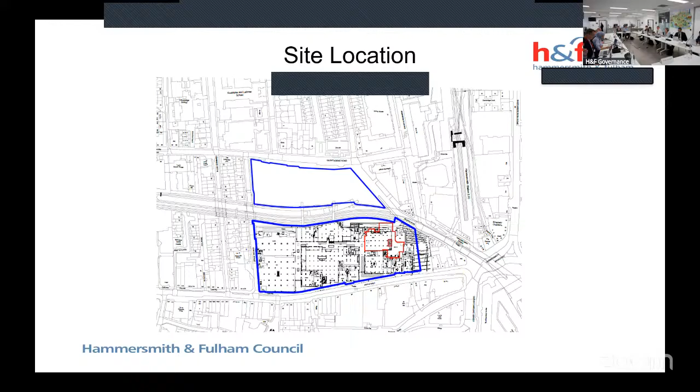That's outlined in red. The shopping centre itself occupies basement, ground and first floors, with 5 storeys of residential development above, known as Ashcroft Square, arranged around a large public square at podium level. The site itself is not within a conservation area, however it is adjacent to 2 conservation areas, namely Hammersmith Town Hall to the west and Hammersmith Broadway Conservation Area to the east.

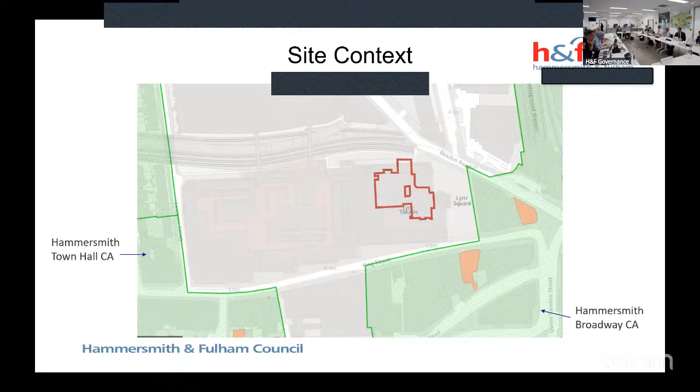The images on screen show the aerial views of the site. Again, the images on screen show the existing site photographs with the entrances to the shopping centre, as well as the inside of the retail unit.

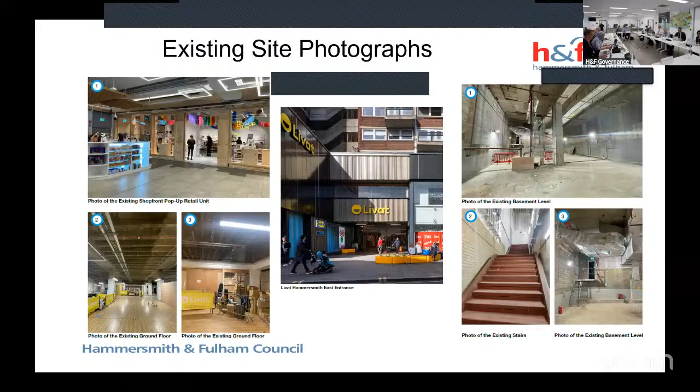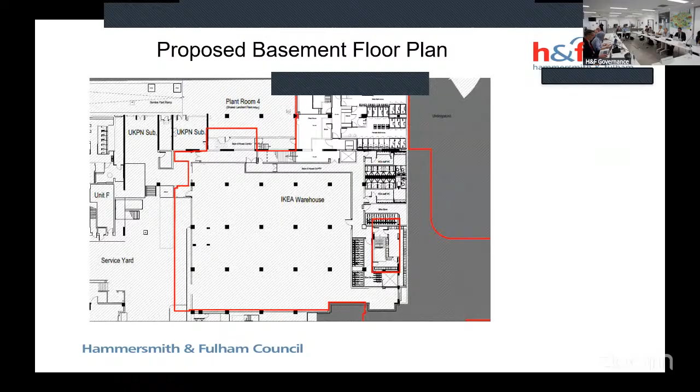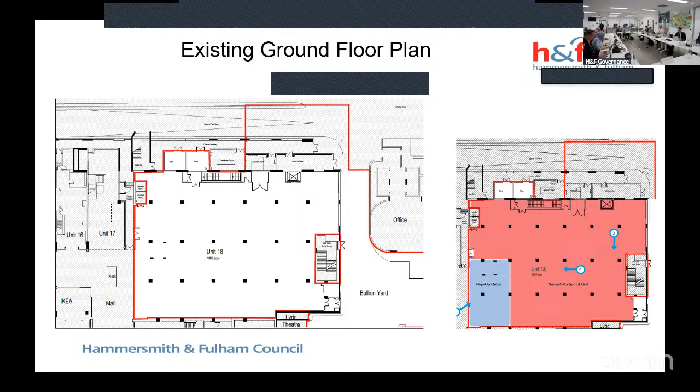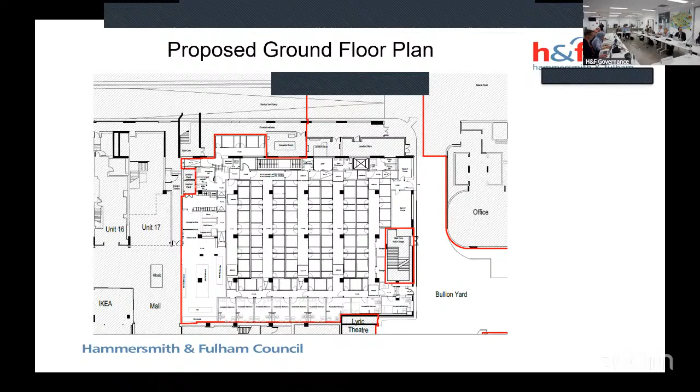This is the proposed ground floor plan, which will contain the hotel rooms or pods. And again, this is the parameter plan, which shows more clearly the uses on site. And this is for the basement.

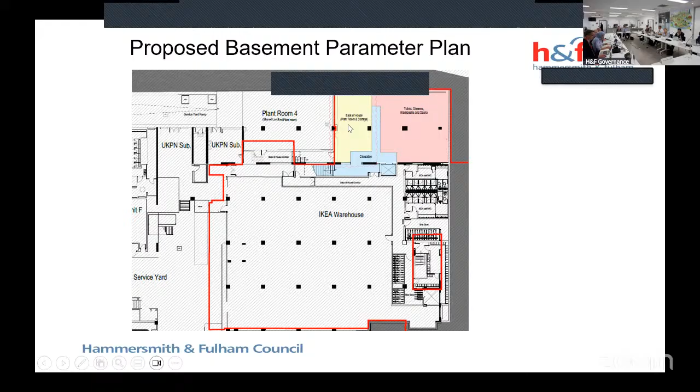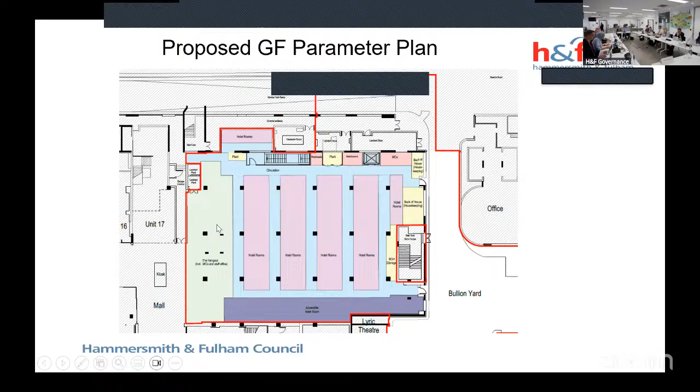You can see the salmon color is the communal shower facilities, and the light yellow is the plant room and storeroom. Similarly for the ground floor plan, this is the parameter plan with the lilac colors where the hotel pod rooms would go, and the darker purple, the accessible hotel rooms. The lime green, light green color is the communal hangout space.

Just a bit more about the City Hub Hotel pod concept. The concept is unlike a traditional hotel. It caters for self-sufficient travelers who are comfortable in a digital environment. Therefore, rather than individual rooms, there are hubs, which include a king-size bed alongside space for storage and luggage. City Hub has shared facilities and spaces, including communal bathrooms and a shared hangout space comprising a reception area, lounge, and self-service kitchen area. These communal areas are designed for people to work and relax.

The operator of this hotel concept has been successfully rolled out in 2 cities in the Netherlands and 1 in Copenhagen. This would be the UK's first City Hub hotel. The idea is that travelers check in themselves and have access to a self-service counter. A City Hub staff member, known as a city host, will be available 24 hours to assist guests as required.

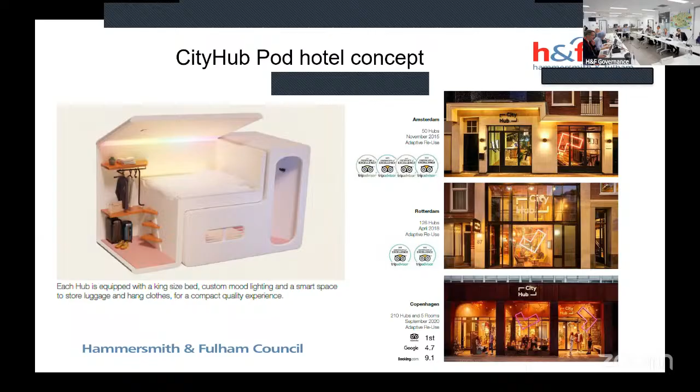The image on screen shows the City Hub concept. You can see in the bottom right corner, these are the L-shaped interlocking pods. So you'd have a bedroom space up here, and you'd also have a bedroom space down here. These are the communal shower facilities. This is the communal hangout space when you first enter the pod hotel. And then these are the self-service check-in counters.

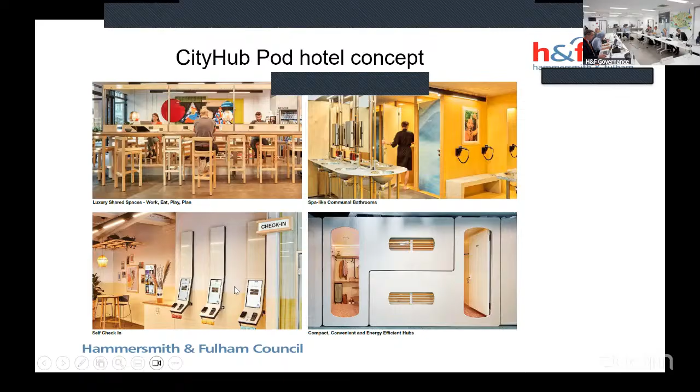In terms of nighttime access, the Livat is open for shoppers between 6:30 a.m. and 9:30 p.m. Monday to Saturday, and 8 a.m. to 6 p.m. on Sundays. Therefore, guests accessing the hotel during opening hours can use any of the shopping centre's entrances, but will most likely enter through the access point on King Street via the access point to the south.

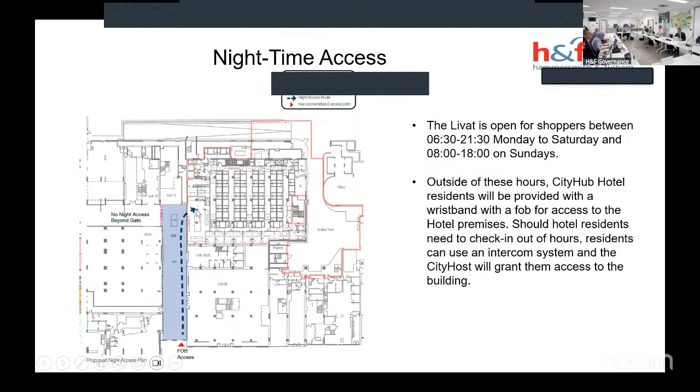Outside of these hours, City Hub Hotel residents will be provided with a wristband with a fob for access to the hotel premises, and the city host will be available to grant them access via the intercom system. The image on screen shows where that intercom would be for the fob access. For nighttime purposes, there'll be a gate here that will be closed, so guests can't access the wider Livat Centre, and they should just be able to enter the hotel itself.

The key issues relate to the loss of the part vacant Class E retail unit and the change of use to hotel. Officers consider this to be acceptable in this town centre, highly accessible location. The existing retail unit has been predominantly vacant since WH Smith vacated in 2020, and officers consider that the change of use into a hotel would not impact upon the viability of the shopping area, and it would help with the vitality of the town centre by bringing in more visitors, which in turn would increase footfall and support the nighttime economy in Hammersmith.

In terms of design and heritage, officers consider there to be no impact as there are no external alterations involved.

In terms of the neighbour consultation exercise, one objection was received from Ashcroft Square. This is summarised in paragraph 4 of the report on page 21 of the agenda pack. However, the main concerns relate to the question around the need for another hotel in the area, concerns over construction noise and disturbance, and potentially more crime in the area.

In response to that, a hotel needs assessment has been submitted, which shows there is sufficient demand for visitor accommodation in this town centre location. Conditions have been attached to mitigate against any potential construction noise and disturbance. This includes a construction management plan and a construction logistics plan. Moreover, an operational management plan has been secured, which will ensure local residents have the appropriate contact details to report any issues. In addition, Section 106 contributions have been secured towards public safety and security in the town centre.

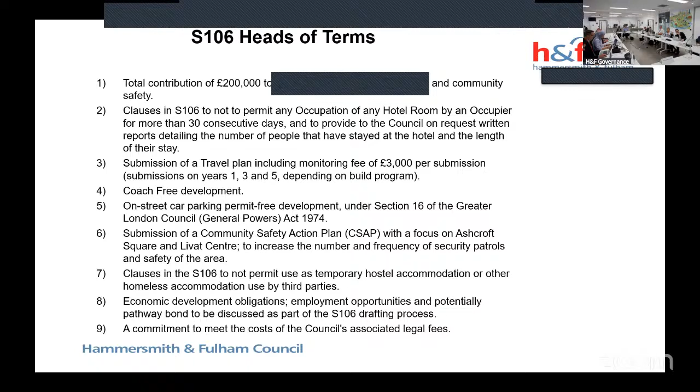For these reasons, officers recommend the application for approval subject to the conditions listed in the report, including the changes noted in the addendum, and successful completion of the legal agreement.

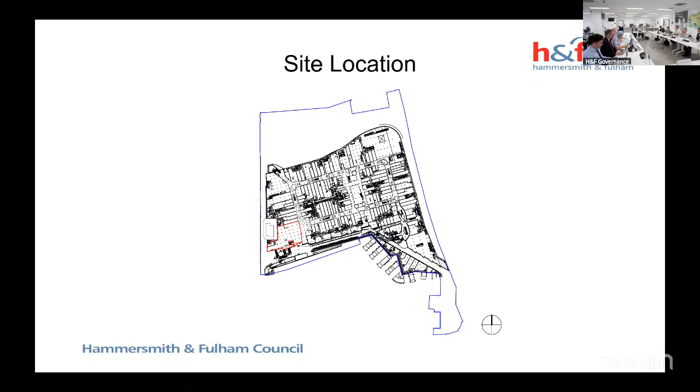The wider Westfield London site sits east of Wood Lane and north of the residential streets, including Bulwer Street, and Caxton Road to the south.

The site has excellent public transport accessibility, level 6A, one of the highest possible levels. The site is in close proximity to the White City bus station to the north, Wood Lane Underground Station, White City Underground Station, and Shepherd's Bush Underground, Overground, and Railway stations.

The site is not within any of the conservation areas, but it sits within close proximity to a number of the conservation areas as outlined in green on the screen.

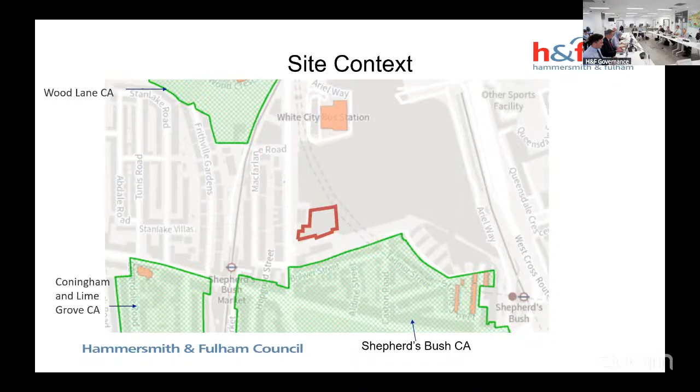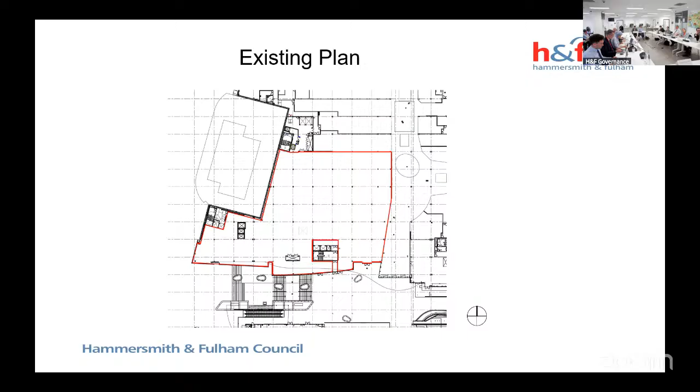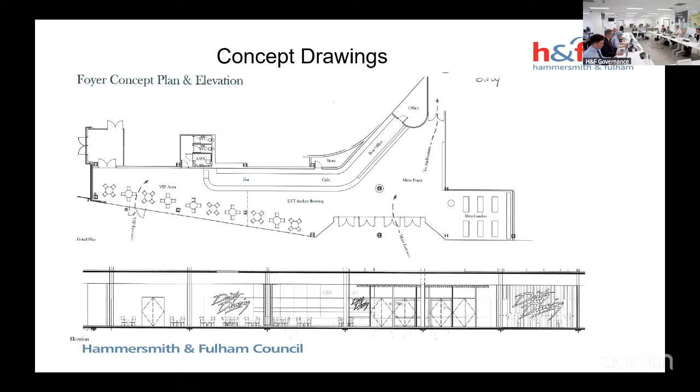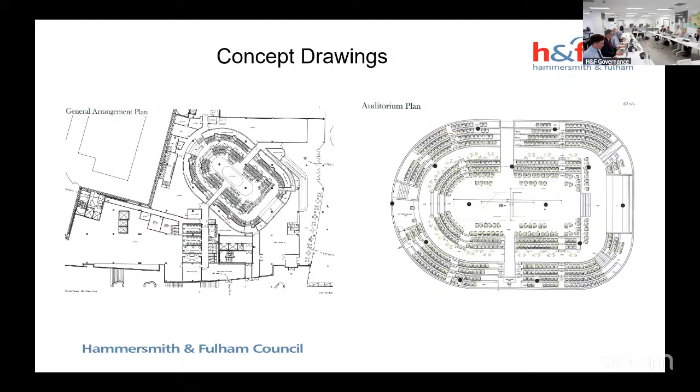The image on screen shows the general arrangement of the auditorium plan, including the seating arrangements. These are some CGIs to help illustrate the proposals, and again, some more CGIs of the foyer and the entrance.

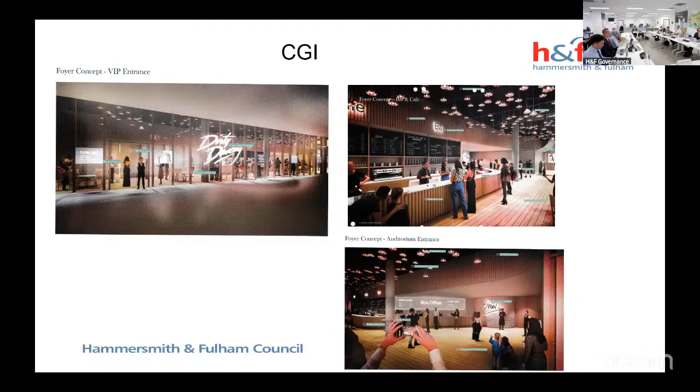The operating schedule for the venue would be Monday, Wednesday, Thursday and Friday with one show at 7:30, and no shows on Tuesdays. Saturdays would have two shows, a matinee at 2pm and an evening show at 7:30. On Sundays, there would be only one show at 1pm.

Doors for the evening performances are expected to open from 6pm, with performances beginning at 7:30pm. The running time is approximately 2 hours and 20 minutes, including an interval, and the last exit time from the venue following the evening performance will be 1am.

The idea is that following the end of the performance, guests have the option to remain and enjoy the music and dance, or can choose to leave the venue. The application is also supported by a dispersal policy detailing how visitors will be managed and dispersed through Westfield in the most efficient way possible, with minimum disruption to nearby residents.

In addition, a final operation management plan will be secured by condition, which will include a commitment to conduct regular community liaison meetings and provide on-site numbers and contact details in the event of any noise disturbance issues. Bearing this in mind, the image on screen shows the anticipated dispersal routes of guests.

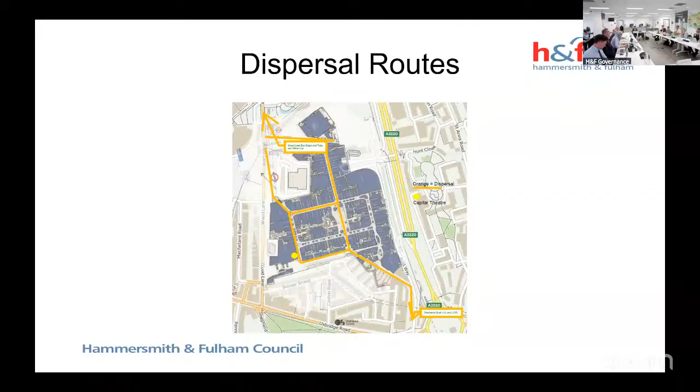Guests will be guided and encouraged to leave via various exits away from the more sensitive residential streets, such as Bulwer Street to the south. The operator has also confirmed that the doors to the southwest corner closest to the Bulwer Street and Wood Lane exit would be locked shut after 10pm, and this would be conditioned or secured via the Section 106 agreement.

In terms of the key issues, these relate to the loss of the vacant Class E retail unit and the change of use to a show venue sui generis use class. This is considered to be acceptable. The existing retail unit has been vacant since Debenhams left in 2020.

The proposed show venue use would add to the existing range of facilities on offer in White City and Shepherd's Bush Town Centre in terms of employment, social and cultural space, and will complement the existing and proposed uses within Westfield Shopping Centre. In terms of design and heritage, officers consider there to be no impact as the change of use is internal only.

In terms of the neighbour consultation exercise, 4 objections were received. These are summarised in paragraph 4 of the report on page 46 of the agenda pack. The main concerns relate to the late closing time of 1am and the noise implications of this and the potential for antisocial behaviour.

As mentioned, a final operational management plan will be secured by condition, which will ensure local residents have the appropriate contact details in case of any noise disturbances. Moreover, given the excellent PTAL of the site, officers are satisfied that subject to conditions, the site can be managed to ensure residents' amenity is protected.

Finally, turning to the heads of terms, the proposed development would include a total financial contribution of £275,000. This includes £120,000 towards the law enforcement team for community safety, £20,000 towards CCTV, £5,000 towards an Ask for Angela or equivalent campaign, £65,000 towards public realm improvements, and £65,000 towards economic development to support the delivery of Upstream London, and finally a commitment to meet the council's associated legal costs.

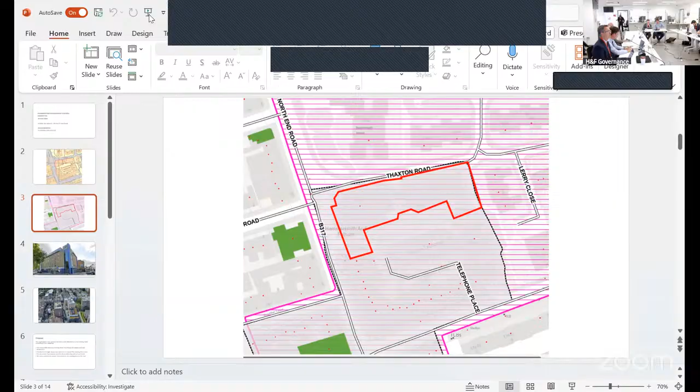Sorry about that. Thank you, Chair. Thank you. Okay, so this application site relates to the existing 150 bedroom Holiday Inn Express hotel. It's located on the east side of North End Road at the junction with Thaxton Road.

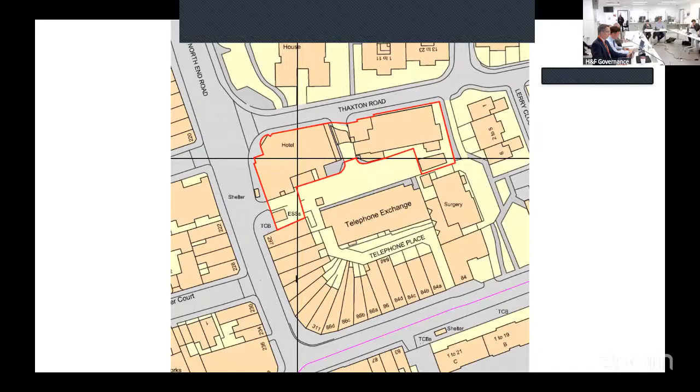In terms of the constraints, it falls within the Fulham Town Centre and the Fulham Regeneration Area. It's not within a conservation area, but it is opposite a local listed former Methodist church, which is on the opposite side of North End Road. It's that green building there.

In terms of the proposal itself, it's a planning application for various extensions and alterations to the existing hotel, consisting of a 6-storey infill extension fronting North End Road, which would provide 20 additional hotel bedrooms. There's also the erection of a 1-storey rear extension to extend an existing linen store, 4 air source heat pumps and 2 air conditioning units on the main roof, and a bin store and 2 air source heat pumps in the car park area to the rear of the site.

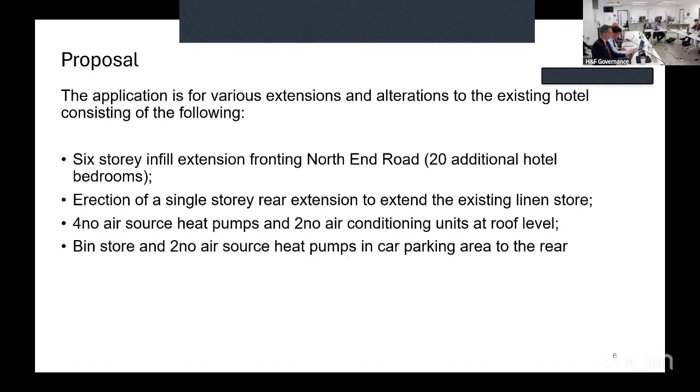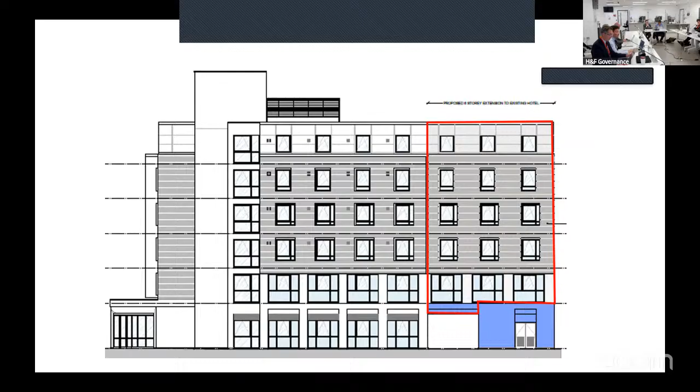Moving on to the front elevations, you can see, as I was just saying, that the proposal would replicate the scale, design and detailing of the existing building. So it's essentially a continuation of the existing hotel, and the existing access to the rear of the site, which is for the telephone exchange building, would be maintained underneath.

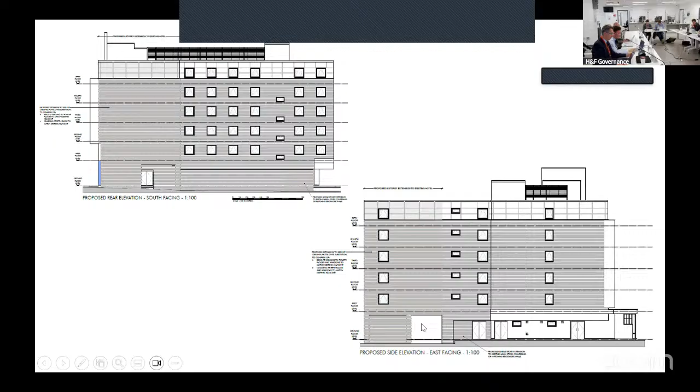As set out in the committee report, design heritage impacts as well as the impact upon neighbouring amenities are considered acceptable. The highway impact would be suitably controlled through relevant conditions in the Section 106, and the proposal would also make contributions towards environmental and safety improvements in the area, as well as economic development.

There's a few updates to the report set out in the addendum. Primary changes are the update to the cycle store condition to require the submission of details so that we can make sure this is secure for future users, and to also add in a condition which would restrict the use of the extension only in association with the existing hotel use.

The remaining updates are primarily to clarify some paragraph numbers and that a bus stop suspension is likely to be needed, which will be discussed within the construction logistics plan, and that the development is exempt from biodiversity net gain. And then just finally to omit reference to a new gate, which isn't part of the proposal.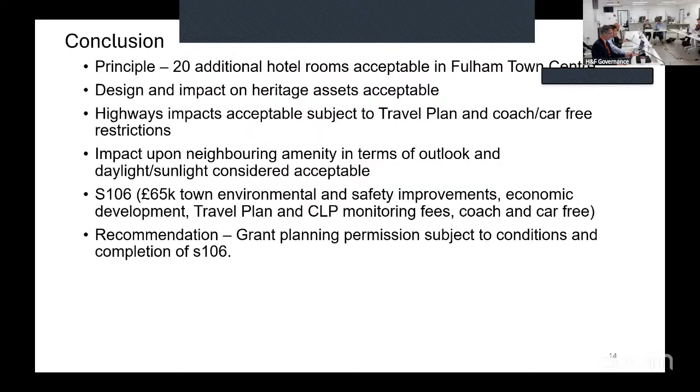The recommendation is to grant planning permission subject to the conditions and the completion of the Section 106 agreement as set out on page 59 of the committee report. Thank you, Chair. Thank you very much, Tom.

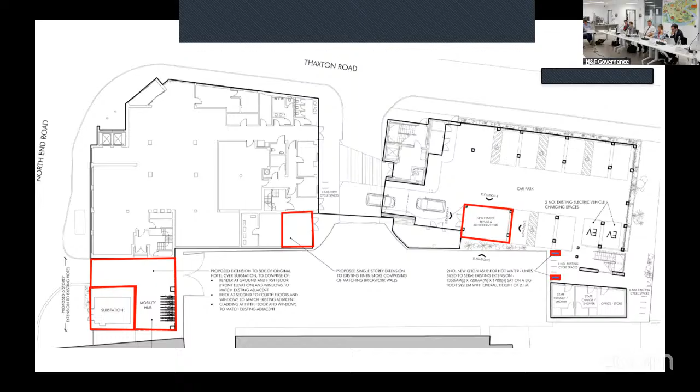I commend particularly the air source heat pumps, that's very good. Two questions: can we look at the roof of the new extension and even ask for more climate mitigation in terms of green roof space, firstly? And secondly, I'd like to go back to the slide with the blue outline of the building.

What usage has the telephone exchange got now? BT are still using it, so Openreach is still using it. I'm guessing it's not an exchange, but I don't know for certain, they may be using it for office space. And the windows that are considered impacted, we don't know, they're not residential - no, basically those windows we can see in the telephone exchange, that's a commercial building.

And on that, we haven't had any representations from them, any comments? Or have we? No, not from them. No. Yeah, okay. And the building that's got the numbers on it, on North End Road, that.

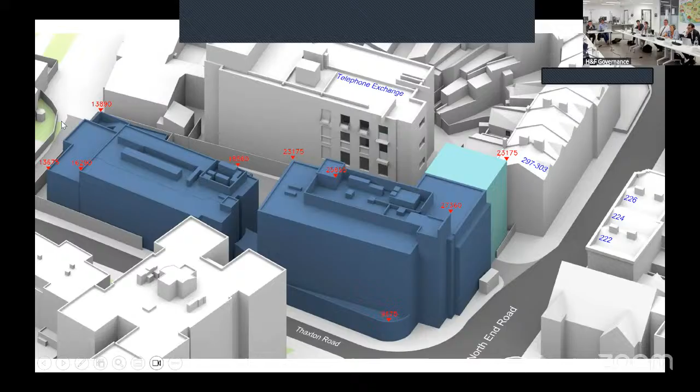Obviously, before that infill, there's a little bit of space, and we've had no complaints of overlooking or overcrowding. So there were some objections, 6 in total, but they were primarily from Larry Close, which is at the back. So the neighbours that are quite a long way away from the site, that's where most of the objections were coming from. They were raising concerns about daylight, sunlight, privacy, things like that. But obviously they're very separated from where this is going.

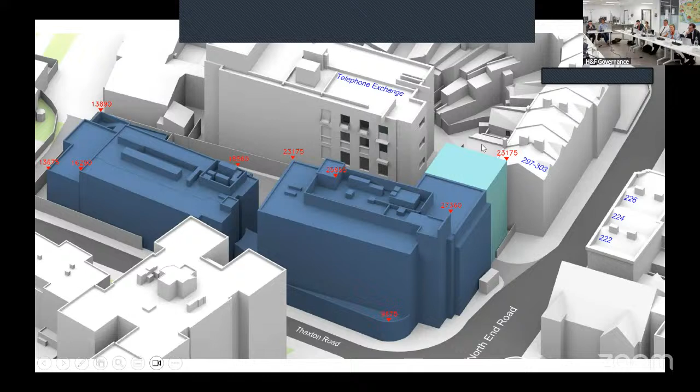So there was a daylight and sunlight assessment submitted with the application, and essentially pretty much every single window passed the BRE guidance. I think there was one window which had a very, very marginal breach of the guidance. It wasn't actually the immediate neighbour, it was the one beyond, 299. But it was a small galley kitchen, which we don't consider to be a habitable room, and the breach was very, very minor.

So overall, given the separation distance from the majority of neighbours and where neighbouring windows are located, it was considered it wouldn't significantly impact on privacy. Further to that, the main windows are in the front and then in the rear. The ones in the rear, all you can see is the car parking area and the telephone exchange. To the front, you're looking out onto the street and the public domain, and the neighbours opposite, that's a reasonable separation distance as well. They already face the hotel.

Thank you for that clarification.

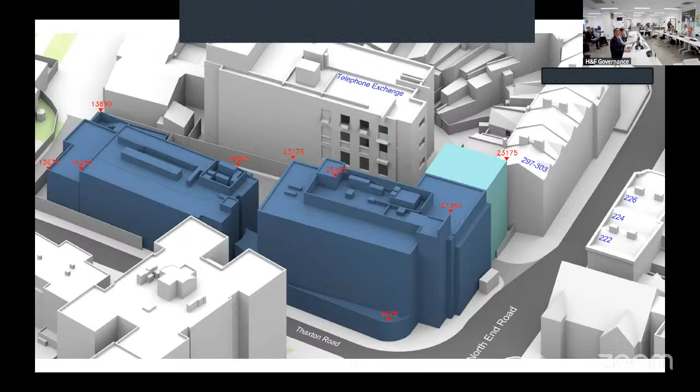And going back to the usage of the roof space that is going, because the light blue is the new roof space, we don't have in any of the supplementary SPDs any sort of encouragement for them to do anything with that new roof space?

So they're actually indicating, sorry, I should have mentioned this before, that they're going to do a blue roof on there to reduce the amount of surface water runoff. So there's actually an improvement compared to the existing situation on site. It's going to help with things like surface water flooding in the area. So I know they're not doing an air source heat pump there, but they are doing something beneficial with that flat roof space.

Just on something you mentioned, Tom, about Larry Close, is the assessment also that there's no impact on them in terms of sunlight, daylight, privacy, and so on? Yeah, and all their windows passed. Okay, perfect, thank you.

Councillor Walsh, you had a question. Thank you, Chair. It's 2 observations mainly.

Firstly, as you outlined, obviously there is some mitigation here in terms of biodiversity, and the blue roof is welcome, of course, but it does seem rather under ambitious in terms of looking to make a climate positive impact here. We have spoken in this committee before that this is a borough where we have declared a climate emergency. It would be beneficial had this application come forward with a little bit more effort, it would seem, tackling the climate emergency. So it's more echoing the comments of Councillor Trehi, and just to express a bit of disappointment in the ambition, notwithstanding that, as you've mentioned, it still remains policy compliant in its present form.

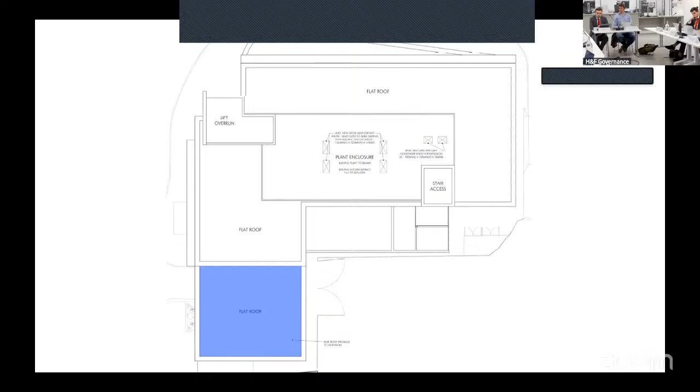I would just say, briefly on that, overall they're providing 6 air source heat pumps. 4 of them are actually for the existing building, so it's an improvement for the existing building as well as providing for the new structure. So overall, they're not just trying to mitigate the impact of the new building, the extension, they're also trying to improve their current energy use across the site. So there is an overall improvement for the building as a whole, but nonetheless it's still some way off in terms of its carbon emissions. But nonetheless, I welcome your clarification in that regard.

The second point is simply a matter of commentary. I know in previous reports that you've brought forward, we've included the construction logistics plan. As anybody that's tried to drive down North End Road knows, it is a particularly congested road and prone to traffic jams. So it's a pity it couldn't have been part of this report, given I would imagine this to be a particularly impactful development, given the location and that junction where this construction is going to take place. So again, more just a comment for future, where there are complications like this, it'd be good to have that to scrutinize a bit more.

I think I do agree with you. I think sometimes it's a bit difficult with certain schemes because they don't have a contractor on board, and obviously it's something where they need the input of the contractor on how they're actually going to do the work. So it's difficult to provide it at the planning stage when you haven't necessarily got those people lined up who are going to do the work. But I do appreciate it could be helpful to have it earlier on to give that reassurance.

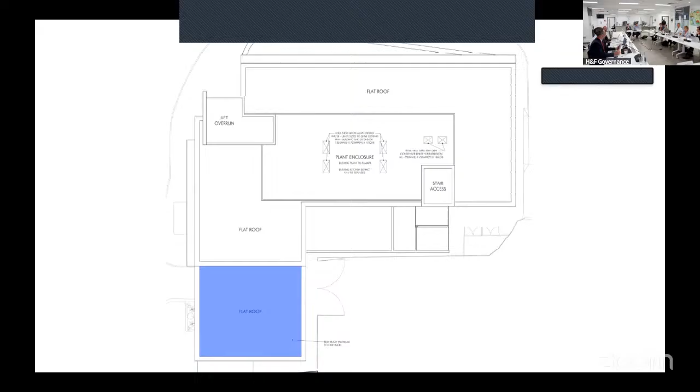First on recommendation 1, which is as in the papers and as previously mentioned, recommendation 1 is agreed. Councillor Trehi, are you voting for, against, or not voting? For. Councillor Painter? For. Councillor Nemo? For. Councillor Melton? For. Councillor Walsh? For. And I will also be voting for. Therefore, recommendation 1 is approved.

Now on to recommendation 2. Councillor Trehi votes for, against, or not voting? For. Councillor Painter? For. Councillor Nemo? For. Councillor Melton? For. Councillor Walsh? For. And I'm also voting for. And therefore, this item is approved.

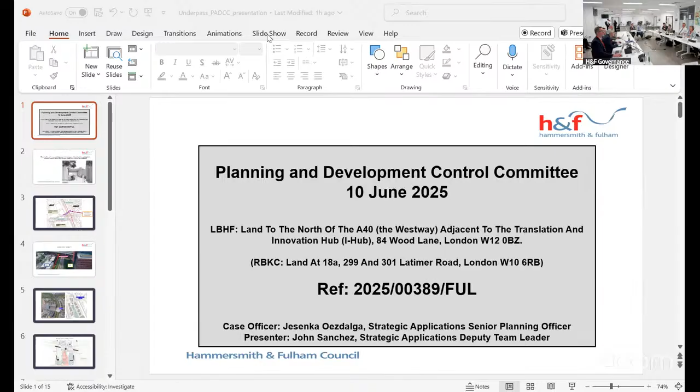Okay, thank you, Chair. I'm going to run through the presentation for this full application, which is for the construction of a new publicly accessible link, including an underpass for pedestrians and cyclists between the Imperial White City campus and Latimer Road. I'll summarise the proposals and the comments received.

Before I start, I'd like to draw members' attention to the addendum. Effectively, the key points are that there's an extra condition included relating to biodiversity net gain, and also some minor changes to the heads of terms, including an additional bullet point, which again also relates to biodiversity net gain.

The application is for the construction of this east-west link, also referred to as the underpass within the committee report. The Hammersmith and Fulham application includes the western mouth of the underpass—the entrance and exit via Imperial Land—and the underpass itself. There's a parallel planning application submitted to the Royal Borough of Kensington and Chelsea, which have their access and exit from Latimer Road.

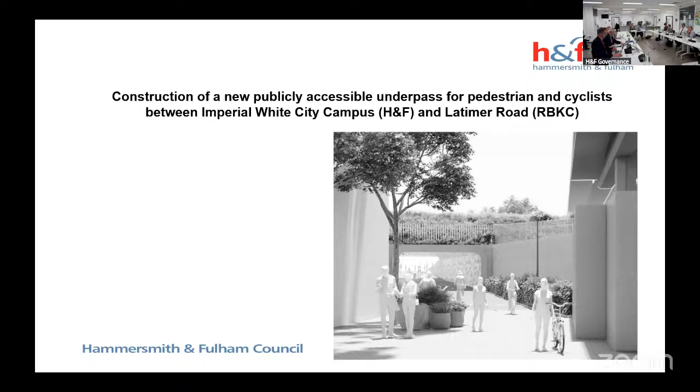Delivery of the East-West link was included in the original 2012 legal agreement. This was a hybrid planning permission, now known as Imperial North Campus, and has subsequently been amended during the years during the build out of the campus, with the last permission for plots A and G in 2020, where the commitment to deliver the underpass is still secured.

The current obligation wording requires the construction of the underpass prior to practical completion of buildings A and G. Building G, for the record, is the School of Public Health, which was completed a couple of years ago, fronting Wood Lane. Plot A is the last remaining plot on the campus, just out of shot in this image, on the corner of Shinfield Street and Wood Lane.

There's a resolution to grant planning permission for a student accommodation-led scheme. That section 106 is due to be finalised shortly with a stage 2 referral to the mayor.

This slide shows the position and proposed route of the underpass in context with the elevated A40. Latimer Road in RBKC is to the left, with existing Imperial buildings to the right. The red line running north to south on the eastern boundary of the embankment is the position of the administrative boundary between the two boroughs.

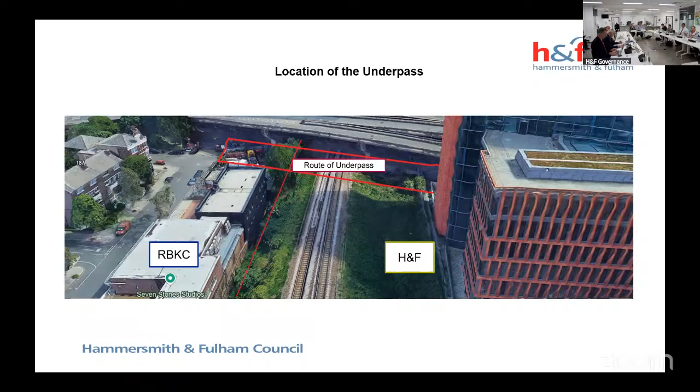The site itself is located within the White City Opportunity Area and also within the White City Regeneration Area in the local plan. The site is also a strategic site, White City East, which includes both the Imperial North and South campuses.

The delivery of the underpass is supported in the local plan, so as to enhance connectivity between the developments in White City, the surrounding amenities, and the wider communities on both sides of the West London line. The underpass would overcome the existing barriers that currently exist in terms of impeding both pedestrian and cycle access in the area. It will promote active travel and reduce neighbourhood segregation.

This slide shows, in a wider context, how important the underpass is in terms of fitting with the wider area, in terms of both east-west connections and north-south connections as well. So the provision of this link would create a shared space through the campus and beyond, including connections to cycle route 34 in Hammersmith and Fulham and Latimer Road in RBKC.

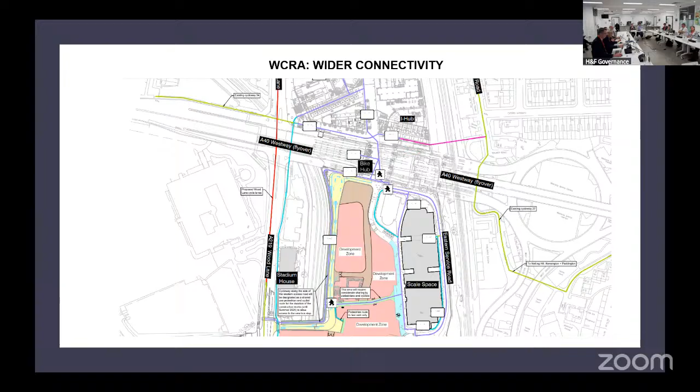This image shows the layout of the link and the underpass. The underpass itself will be constructed perpendicular to the railway line. It would be publicly accessible and remain open and passable, except for when there are requirements of Network Rail, TfL, or Imperial to carry out maintenance work to their respective parts.

The full length of the link itself is 68 metres. The middle portion, which is roughly where the railway line is, is roughly 20 metres in length and 6 metres wide. It comprises a pedestrian walkway, which is 2.25 metres, and a cycle path, which is 3.5 metres.

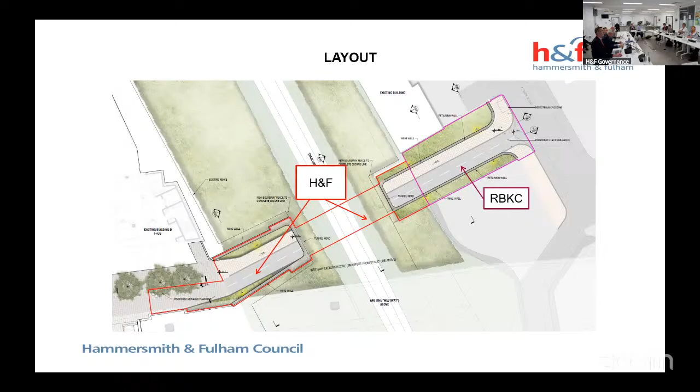The underpass itself would have a consistent floor-to-ceiling height of 2.85 metres. This will provide both pedestrians and cyclists with a clear, unobstructed view through the underpass from either end. Splayed sight lines at the mouth and tunnel approaches would provide greater visibility.

This image shows the current situation, south of the North Campus. You've got the iHub building to the left, and the elevated Westway to the right. The existing site layout currently has a dead end formed by the railway embankment, the position of the imposing Westway, and the current back-of-house delivery arrangements to the Imperial iHub building.

This shows an image. To the left is the existing situation, these are retractable bollards which are in place for vehicles entering the iHub building for deliveries and servicing. The image to the right shows a contextual image of essentially what the view will be once the development is completed.

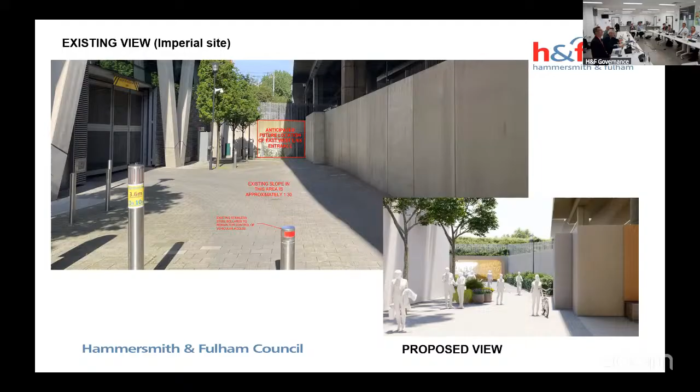This is the view from RBKC Latimer Road. The existing arrangements have most of the land enclosed by this unattractive metal fencing around the perimeter. The image to the right shows the access from the RBKC side.

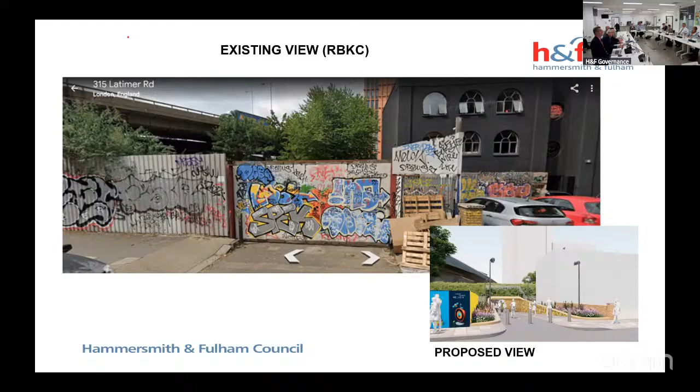In terms of the planning application itself, it was advertised by site and press notice with 360 neighbour letters. In total, 16 representations were received, all in support. They were from Imperial community residents and researchers, residents outside the Imperial campus, together with representatives from Queens Park Rangers Football Club, the Hub, and Ed City.

TfL have commented on the application as the Strategic Transport Authority and landowners. As a result of this, we've agreed to an asset protection agreement, which is captured by condition. In terms of the planning application submitted to RBKC, that's actually going to their committee this evening.

That application has received 30 representations, including 27 in support, including representation from the St Quintin and Woodlands Neighbourhood Forum, who are supportive of the proposals.

This image here shows a cross-section. So one of the key issues here is obviously about accessibility, and effectively what you're dealing with is almost a 2 meter drop between the RBKC side and Hammersmith and Fulham.

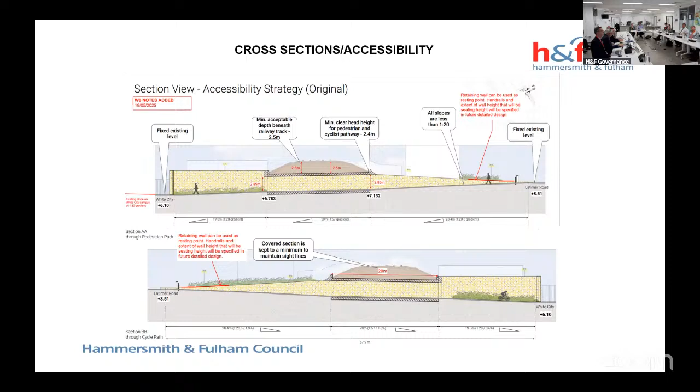So in conclusion, the scheme complies with the development plan. It delivers a more direct, safe and attractive pedestrian cycle link through the campus and enables improvements in terms of connectivity and accessibility. The underpass and the associated routes through the campuses would provide a safe and welcoming environment. Officers consider the proposals to be acceptable, subject to appropriate conditions and heads of terms included in the report and the addendum.

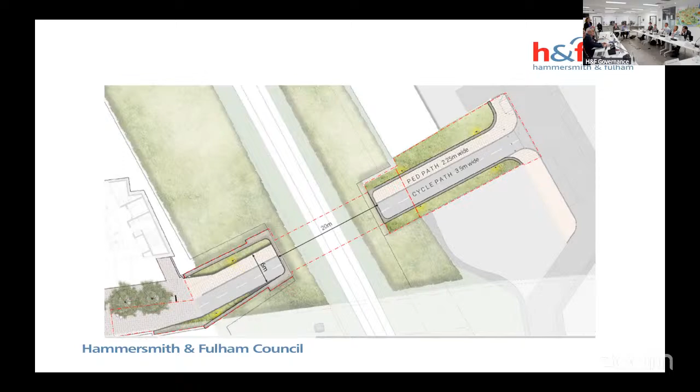Yeah, just, no, sit down, make sure you turn the microphone on. There we go. Yeah, it's important. Good evening, I'm Sarah Carey.

I'm the Chief Development Officer for Imperial. I'm very pleased to be here tonight.

I think it's important to say that the proposal addresses a long-standing obligation that you, the London Borough of Hammersmith and Fulham, agreed with Imperial was an important piece of public infrastructure. So this is something we've been talking about for a very long time, and we both agree it's really important to do and to build, but we do need to do it right and to the right level of design.

And we both, I think all parties, understand that it's not just a benefit to Imperial and our students and our campus, but it is a legacy project for the wider area, and it forms a real important part of our long-term commitment to the White City Innovation District.

John's been talking about how it's a fully accessible pedestrian and cycle connection beneath the West London line, that's the Mildmay line. Today that journey between North Kensington and White City takes 15 to 30 minutes by indirect routes. This link will reduce that to just a few minutes, creating a really safe, inclusive connection for residents to schools, health, and community facilities.

Both sides have got nice schools, nice leisure centres. It'd be good to be able to get to them more, and helping to knit together two vibrant but currently disconnected neighbourhoods.

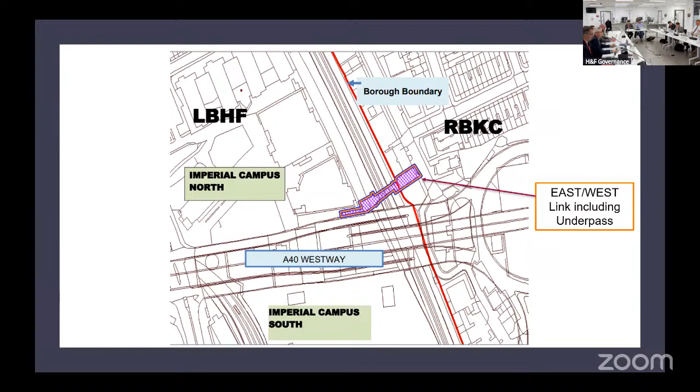Councillor Trey: Not really, more a point, but I think you've largely spoken to it. Historically, underpasses under the Westway have been fairly uninviting places, particularly safety-wise. I think you've really spoken to it, but again, can we speak to how monitored the upkeep and the monitoring and the safety of this underpass will be? Thank you.

Yeah, obviously there's a couple of factors here. First of all, the existing conditions on the site. You've got a North Campus which is now substantially completed, and Imperial now moving on to starting to develop out the South Campus. First, the design of the underpass itself. One of the key changes between this design and the 2014 design has been to open up the underpass as much as possible, so there's clear visibility through it at either end.

There's obviously the lighting, there's CCTV in terms of security cameras within the underpass itself and the wider campus. The other thing is also in terms of general security, which is maintained and managed by Imperial across their whole estate. The CCTV itself is linked to their control room and also back to our system as well.